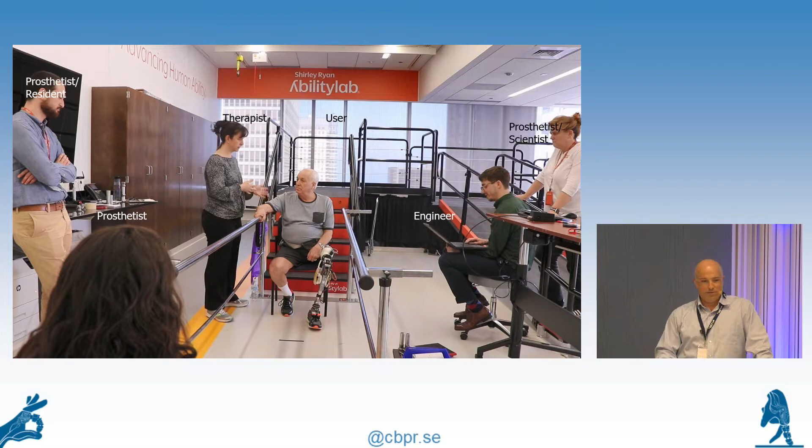This team really works together, and this is an example of what some of our experiments look like. There's a lot of people in the room trying to figure out what the patient really is asking for. The user is talking to a therapist, because engineers just don't speak the same language, at least not initially. So the therapist is translating what they want the engineer to actually make for a change for the user, so that hopefully this interaction will result in something beneficial for this gentleman.

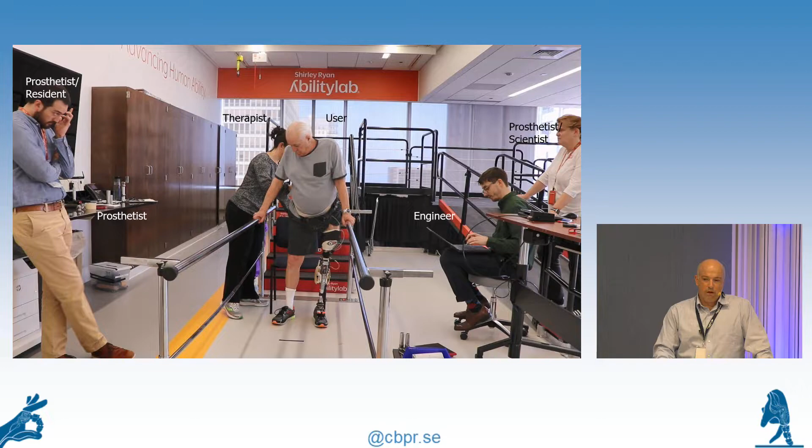So this would be a typical setup. We would have maybe 5 or 6 or even up to 8 or 9 people in the room trying to make configurations that would help a user like this.

I'm going to be talking about the leg work today, but we also do a lot of other work as well, some wearable sensing, some upper limb work, a lot of machine learning, control system development, so just a mishmash of things. We've been working on controlling powered legs since around 2008.

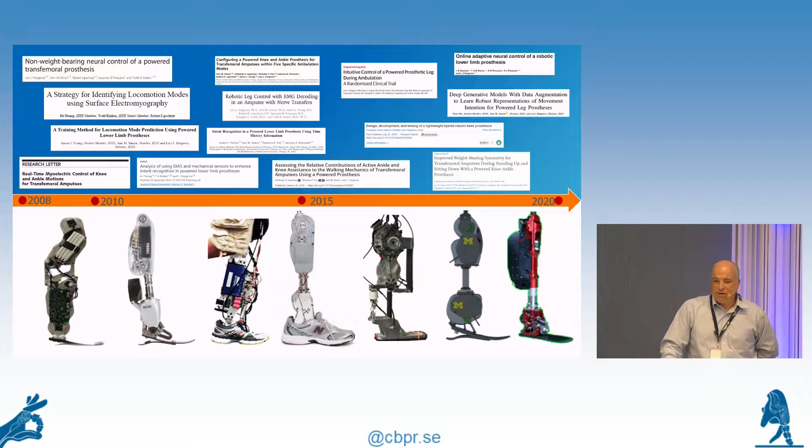We've worked with many of these devices, if not all of them, at some point, and we've published a lot of great work along the way. The one I'm going to be speaking about mostly today is this open source robotic leg that Elliott Rouse has been the force behind.

He was in our group and he moved to Michigan. He has a large lab there. And this is funded by the National Science Foundation.

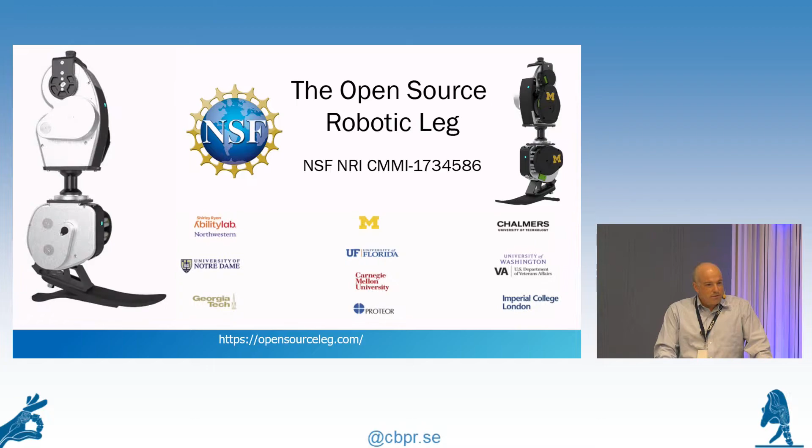There are a number of groups starting to use this device, so you can get the characteristics of the device online. He has a great web page. A lot of engineering parameters are described, both the knee and the ankle, and there are YouTube videos on how to make and assemble it. So it's a pretty good resource for anyone who wants to get into this activity without having to put in $500,000 to design and develop your own device from scratch.

I wouldn't say it's meant for users to use at home. It's meant for research groups to assemble and then do research studies on, for example, a new control system or a rehabilitation intervention, but it's not meant to be used for people at home as their daily use prosthesis.

And it's not cheap, but it's not expensive. You can make your own open source leg for around $28,500 US.

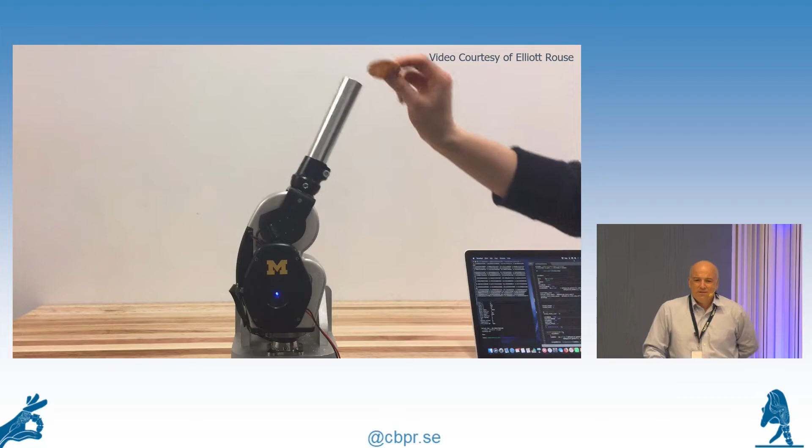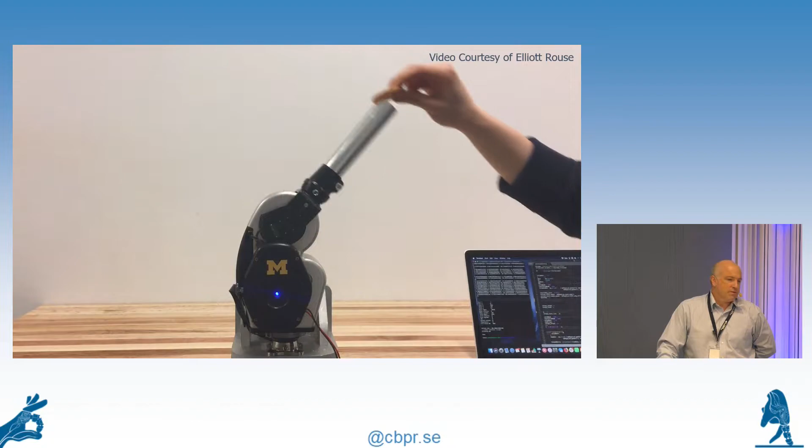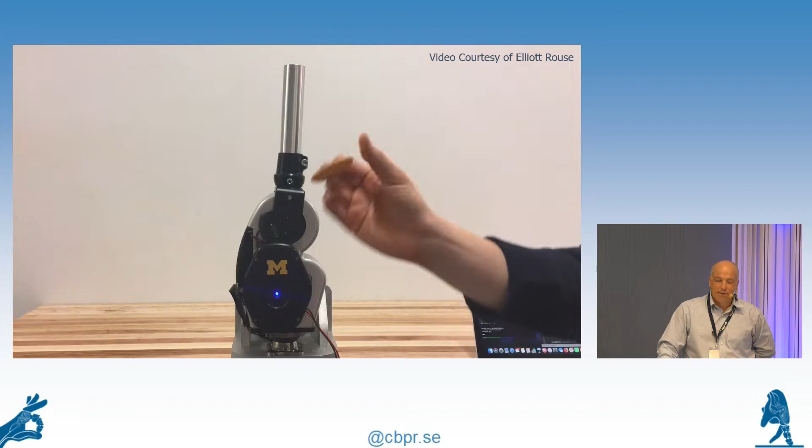And yeah, they have to break the cracker to make sure that everyone believes that it's actually a cracker and not a 3D printed super stiff representation of a cracker.

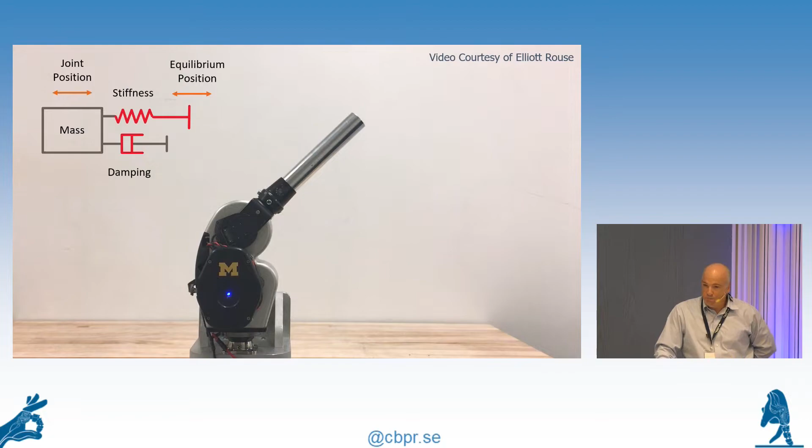We use it and programmed in an impedance control mode, and this is a mode that a lot of people use when doing this type of work. So you make the device behave like a mass spring damper system, and we usually adjust the parameters associated with stiffness, damping, and equilibrium position. The mass is what it is. You could program a virtual mass if you wanted, but we are usually changing the stiffness, the equilibrium point, and the damping of both the knee and the ankle.

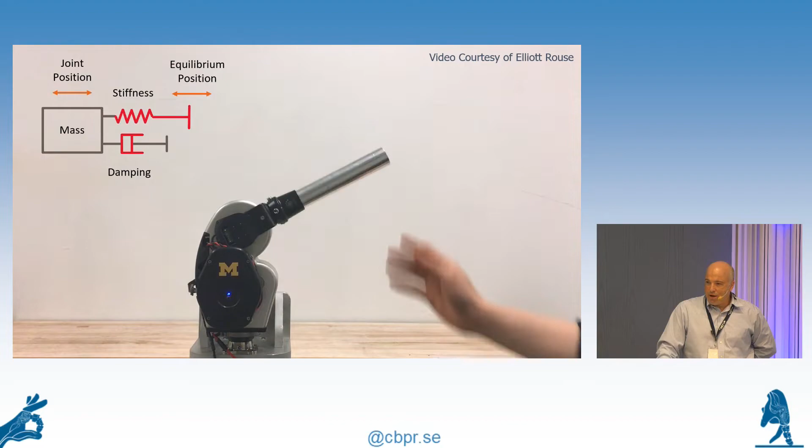And so that leads to a lot of parameters that do need to be hand-tuned by the research team.

It has a number of different sensors available on the device. It has a 6-degree of freedom load cell built into it, showing the FZ, the vertical axis force. We have encoders at the knee and the ankle. We have IMUs, and we also incorporate EMG to some extent as well. I think Helen is going to be talking a lot more about neural control of legs, so I'm not going to be speaking about it in depth. She's kind of developed that field, and I'll let her speak about that this afternoon. But we do use some EMG signals.

So we and many others, this is a common way to program powered legs: to create finite state machines. Each one of these boxes is a state, and you program the person to go from early stance to mid stance to early swing to terminal swing, and you program those impedance parameters I spoke about before. So you adjust the stiffness, damping, and equilibrium position. There are 6 parameters to adjust in each one of these boxes—3 for the knee and 3 for the ankle.

So it seems to be a complicated process to configure these finite state machines. It turns out that after we have tuned these for a number of people, we're really only adjusting about 14 parameters, even though there's around 200 or so that you could adjust. It turns out there's around 14 that we do adjust commonly, and we try to make those related to things like how much energy you need to lift up the stairs and things like that. So again, that's why the therapist is talking to the engineer in that early video, so that we can convey that information of what needs to be changed. I'm going to come back to the state machine because recently we've been removing it entirely, and we have a new way to control. But we've done work on this since 2009 to develop this state machine.

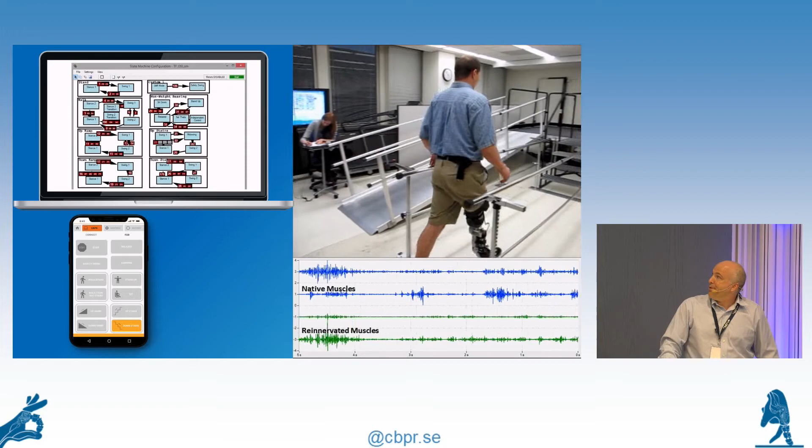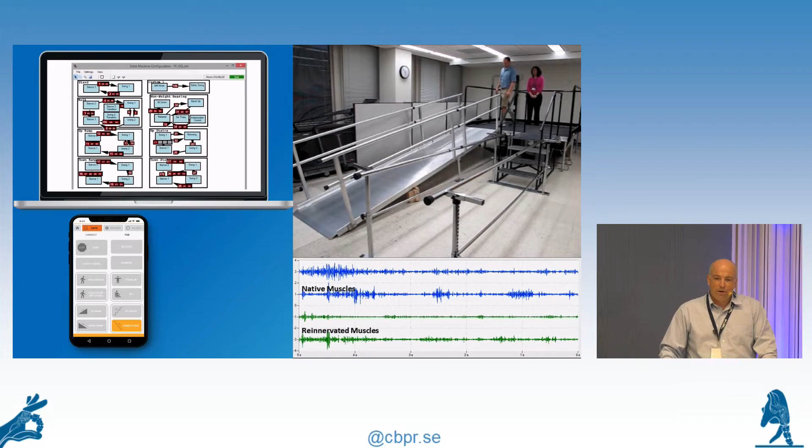So this gentleman actually had TMR on the leg as well, where you kind of use all of those sensors and have tuned a real-time control system, and this is what a person can do. So they don't think about controlling their knee or ankle independently—they think about walking or ambulating, and these are all the different activities that could be restored. These are the EMG signals that are kind of generated as the person's walking. And then we can do non-weight bearing independent control where you just use your EMG signals to control the knee and the ankle.

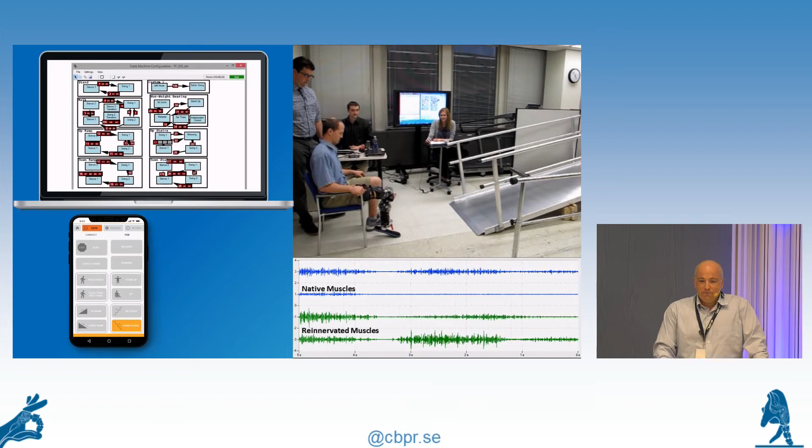So this video was taken in 2012, and since that time, we've tried a few different legs, but we've mostly been trying to make it work like this every time without having a team of 8 or 9 people set up the device for the user. So that's not glamorous work, but it's hard, and someone needs to do it.

So put it on and go.

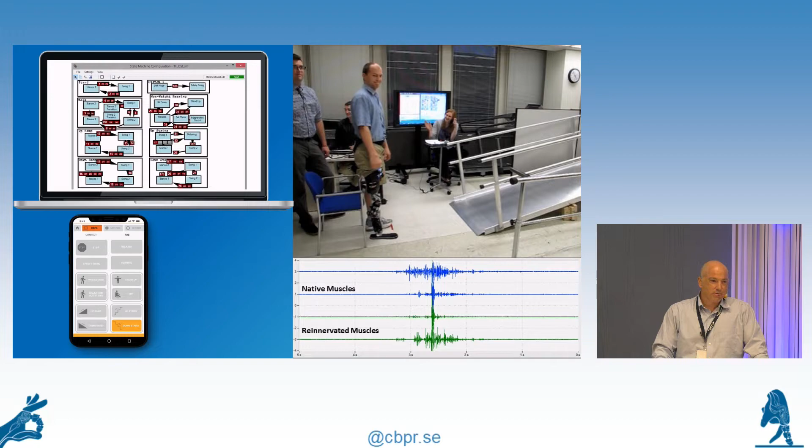The EMG aspect has been very challenging because getting EMG signals inside of a socket for the leg is very difficult. That's why we're over here, and we want to try this out with some individuals who have had osseointegration and don't have the socket to deal with, so we're excited to see what capability that might provide for us.

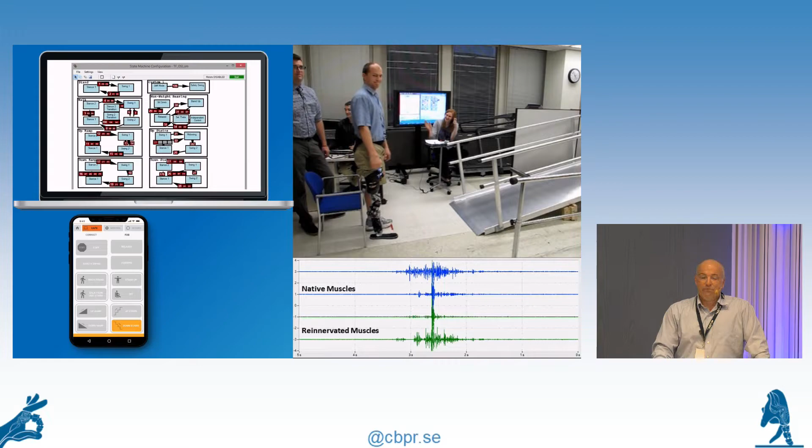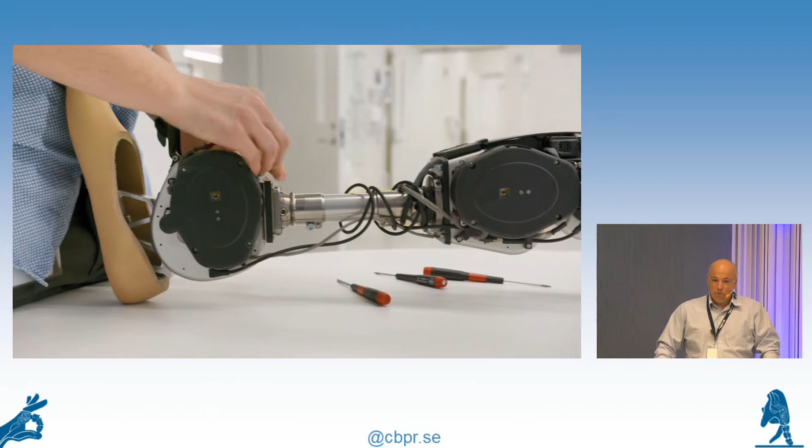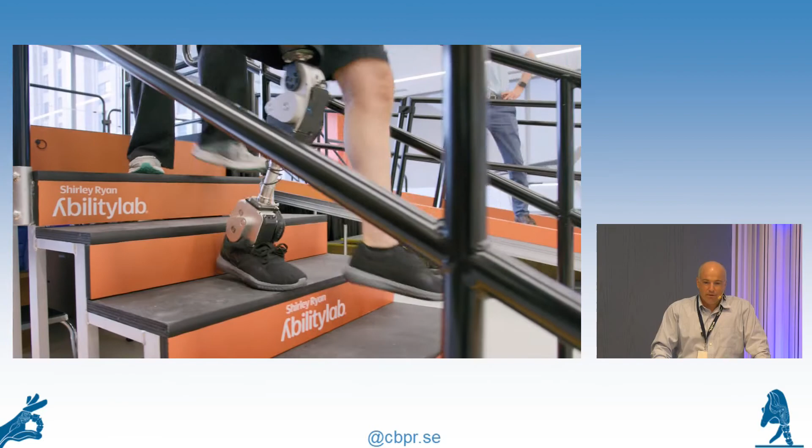When it behaves well—this is with the open source leg, a newer video, this is a produced video—you can see a user using the device to walk around on a number of different activities. This is in our new building and in our new lab, and we are able to get outside of our experiment room, around the hospital and around the community in Chicago, but always under the supervision of a research team with this particular device.

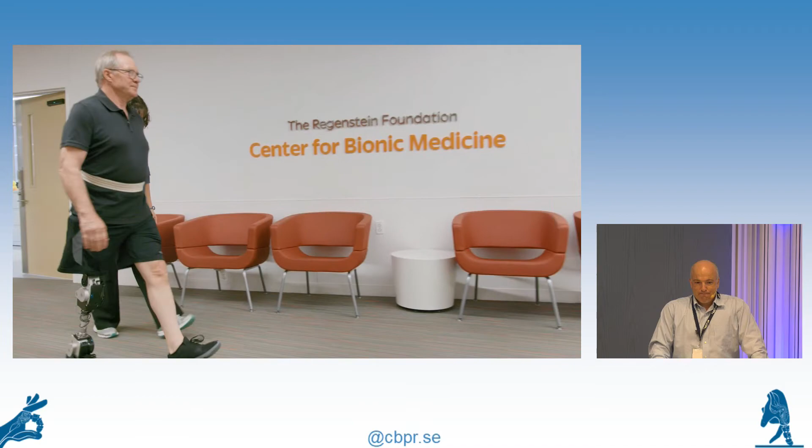But again, we can program it now. We have pretty smooth ambulation up and down slopes. We can do sit-to-stands pretty reliably. This gentleman is around 75 years old, but he is a very good walker. I wouldn't say this device is enhancing his function, but he's definitely helping us develop the control system.

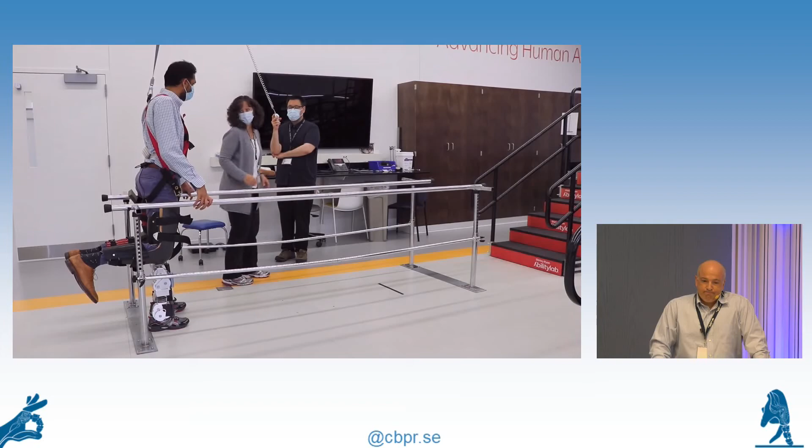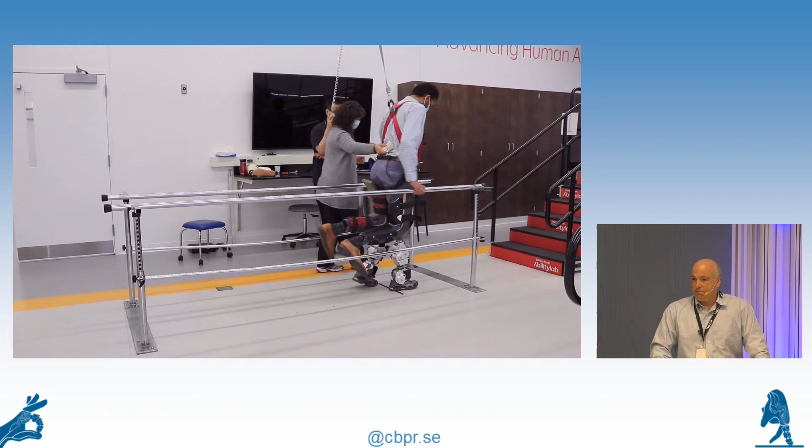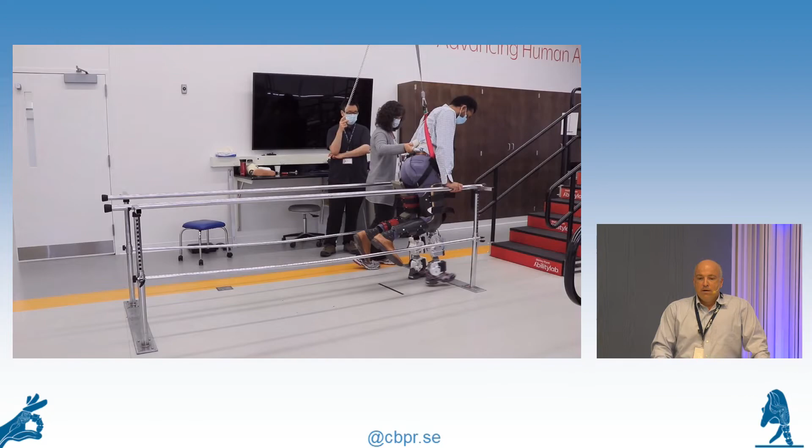So you can control two legs at the same time if you want. This is using an able-bodied adapter, and we're trying to control both of these legs at the same time. The legs are talking to each other, and they also have the capability to communicate to the user through their EMG patterns. In this case, we're just using mechanical sensors, but we do have the EMG capability in. We have to modify our state machine to take advantage of using two legs at the same time.

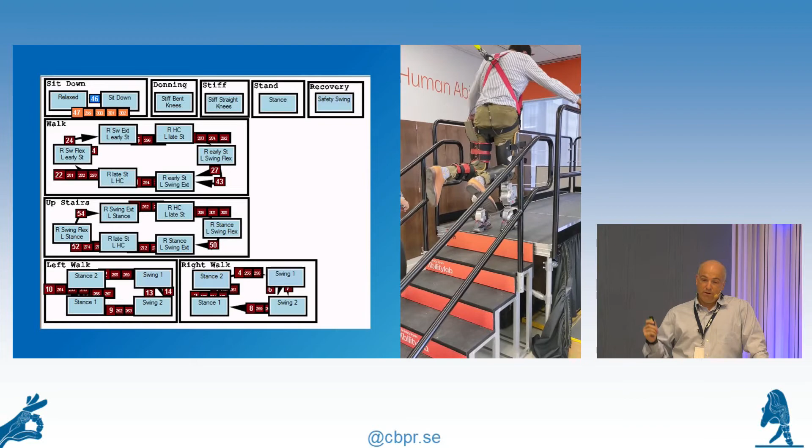Starting to replicate reciprocal stair climbing for a bilateral lower limb amputee is very difficult. Tommaso Lenzi just published a video of an amputee doing this with powered legs—it's very impressive. Actually going down the stairs is harder than coming up, and we haven't figured that out yet, so you'll see the video stops right at the top of the stairs. But work in progress, we'll get there.

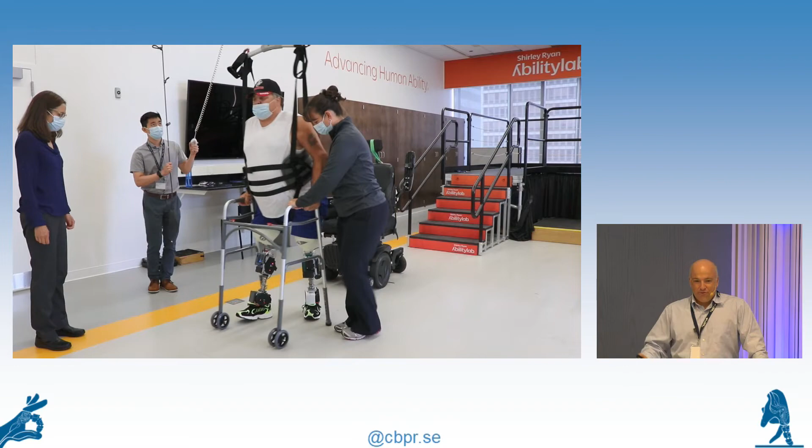And then, of course, able-bodied adapters are one thing, and high-functioning individuals are one thing, but this is a real user who has a bilateral amputation. He's heavy, he has contractures, and he's just taken his first few steps with these powered legs.

And so someone like this is who a powered leg could potentially help with, much more research and development needed to go in and make it safe. And so walking up slopes and walking upstairs is glamorous, but what this guy really needs is this.

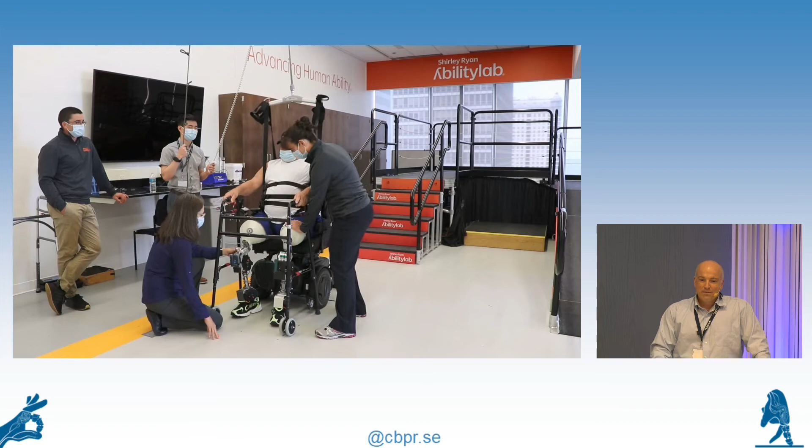He just needs to be able to stand up out of his wheelchair. We still have therapists and people helping out there, but seeing him try to stand up with two Genium legs, he just can't do it at all. So this is an example of where we're using the power in a sit-to-stand circumstance just to stand him up. Even if we made the legs behave more or less passively after he stood up, that would be a functional benefit for this user. So this is kind of where we show the videos of people doing all of these different activities.

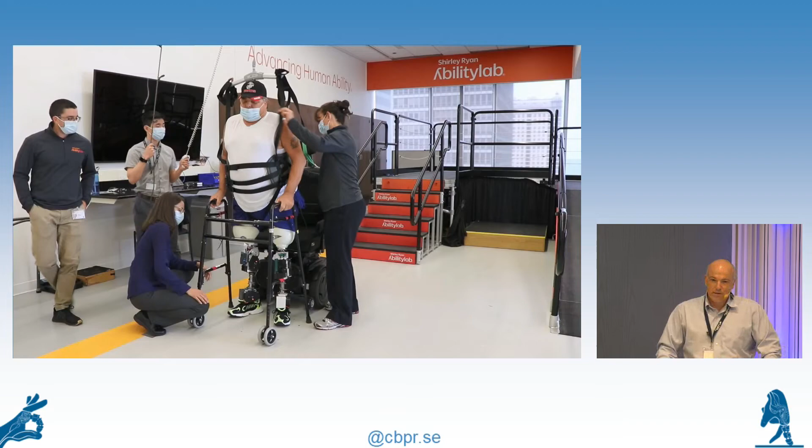So again, I have a bit of a love-hate relationship with state machines. We didn't start out trying to develop state machines to restore ambulation of all these activities. We wanted to do machine learning to predict how the person wanted to ambulate. And we designed these state machines just as an enabling tool that allowed people to walk.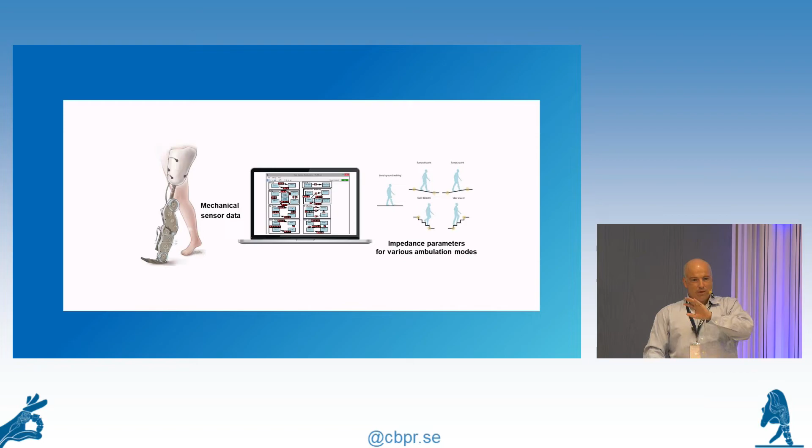So what we've been doing more and more recently is we've just been learning the motor currents from the sensor data directly. We have 50 or 60 people that have walked on these powered legs. We have input sensors, we have output motor currents that are being used. So we can just get rid of the state machine and use deep networks to learn the mapping of the input sensors to the output controllers. That's kind of what we're working on at the moment.

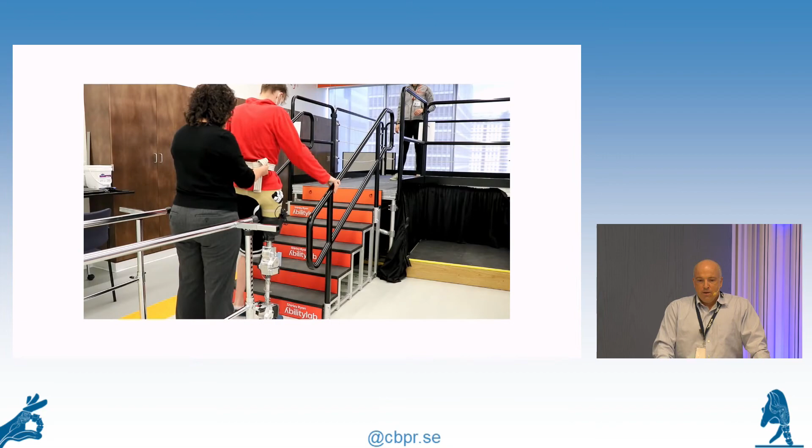And it actually works. It was mind-blowing that we're able to have this person—and the network wasn't trained on this person, he'd never seen it, though he had walked with the powered leg before—but we're able to start replicating walking. So this is with no tuning parameters. You just have a pre-trained network of many different users, and the network can generalize to the person's height, weight, and amputated side. And you can do activities like stair climbing as well.

And so there is a bit of a catch-22 in that you needed to have those sensors from other users. Essentially the deep network had learned what the state machine structure was. So what we're doing now is we're imposing models through OpenSim to see if we can learn these mappings from musculoskeletal models rather than real data. I think that'll be harder, but in the end it might be a more powerful tool because you can customize, you can provide potential customizations of the model rather than relying on this data-generated approach. And if it works well, you can probably put in new activities that haven't been configured, but we'll see. So that's ongoing work in progress.

So with that, I'll conclude. Looking forward to the rest of the meeting and collecting some data here next week. It's going to be a lot of fun. And then thanks for having me.

There's one question from a participant online: are you planning or are you working with exoskeletons already? We are working with exoskeletons, yes. We're just kind of starting to work with exoskeletons. Jose Pons is the scientific chair of the Legs and Walking Lab at the Shirley Ryan AbilityLab, and he has some exoskeletons that he's working with. So we're starting to migrate some of these approaches towards exoskeletons. We're very preliminary, but it's on our development path. So I would say we're just dipping our toes in the water.